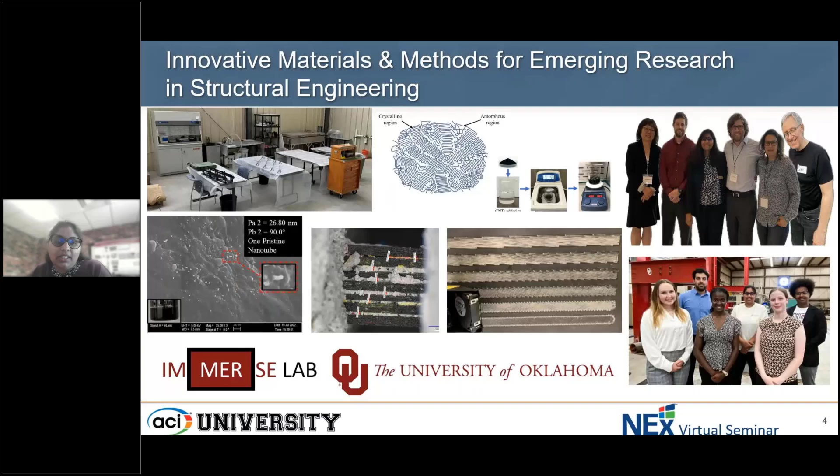The work I'm presenting is part of 8 publications, so you're more than welcome to dive deeper into anything I refer to here that you're interested in. A lot of this work was conducted at the University of New Mexico, in the Dana C. Wood Materials and Structures Lab, where I received my PhD. My students took over some of the work, and we published more in terms of concrete as well, which I'll briefly go over today based on time.

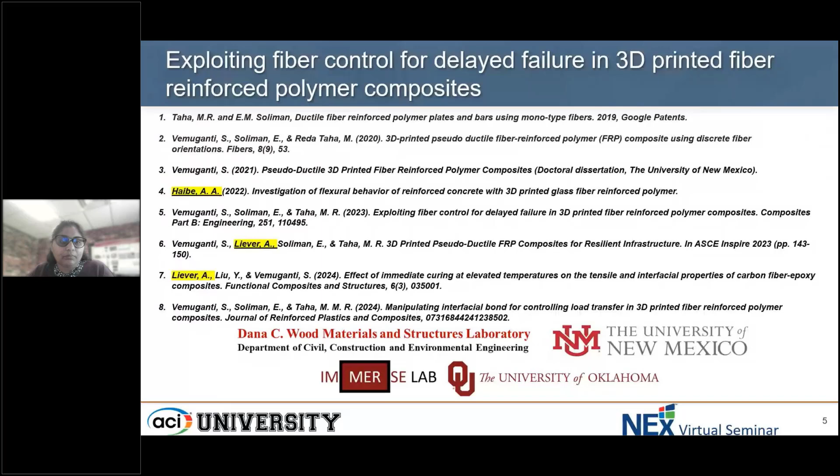Before we get into 3D printed fiber reinforced polymer composites and fiber control, let's talk about FRP itself. We have two primary components: fiber and matrix. Together they become a composite material that not only provides stiffness and strength because of the fiber contribution, but also protects and transfers load between the fibers due to the matrix component. So the entire composite is superior to its individual attributes, and both the fiber and matrix play a crucial role.

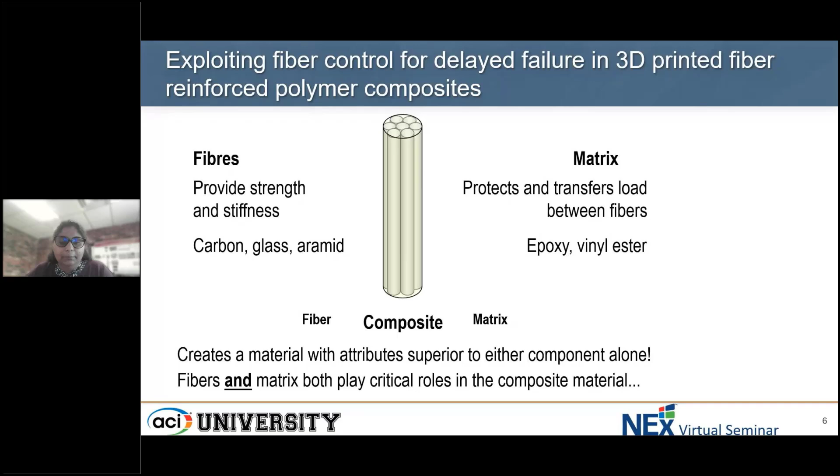Fiber reinforced polymer composites are more popular than ever in different kinds of fields, demonstrating various properties: long-term durability, lightweight, high strength, impact resistance, and corrosion resistance, which is one of the primary uses in civil engineering. Rebars with carbon and glass fiber reinforcement demonstrate great corrosion resistance that other materials in civil engineering cannot demonstrate.

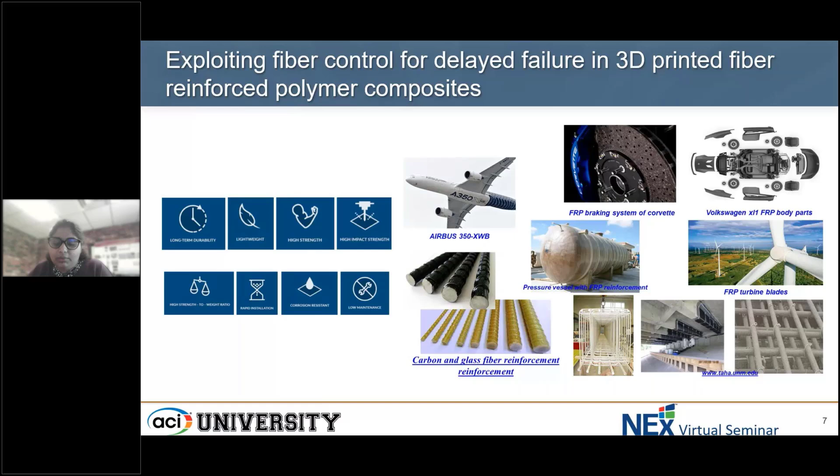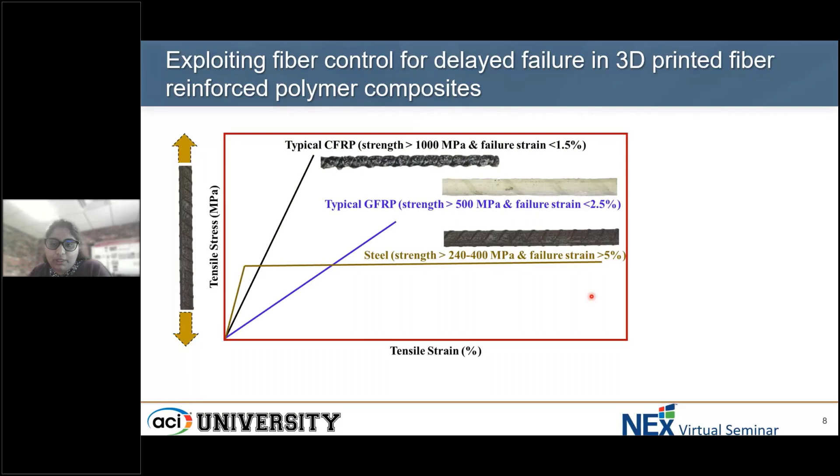We have conservative design limits, so to take full advantage of its tensile strength, its ductility definitely needs improvement. Multiple efforts were made in the past, especially something called fiber hybrid composites.

We have pseudoductility, which is a flat topped stress strain curve of a monolithic tensile test setup, and a ductile behavior that offers the strength needed but also prolongs failure to a higher strain.

But the limitation of these fiber hybrid composites was found to be that high strains are possible, but only at low strengths. There is therefore a large reduction in capacity, though they can offer those high strains.

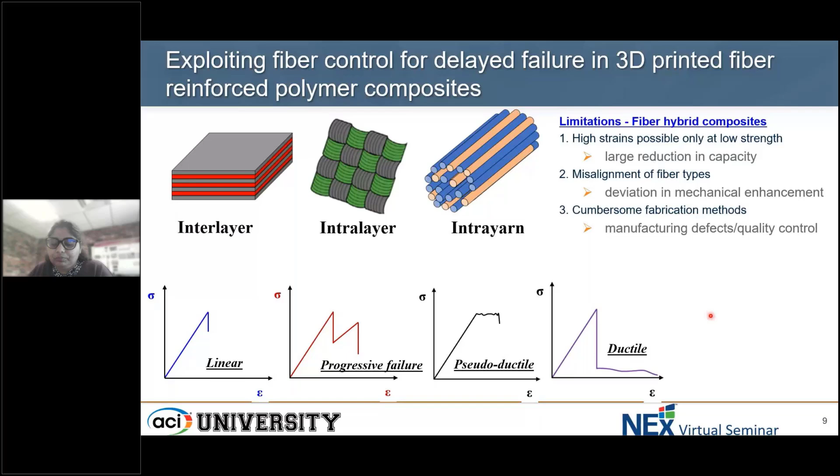For this particular topic, the goal really was to achieve a ductile or pseudoductile FRP composite. But the goal is to achieve that using only one type of fiber, meaning either glass or carbon, doesn't matter, but only one type of fiber, in other words a monotype fiber instead of a hybrid type fiber.

And the way we want to achieve that goal is with 3D printing. So I'm going to discuss some of the outcomes of this particular process that we adopted.

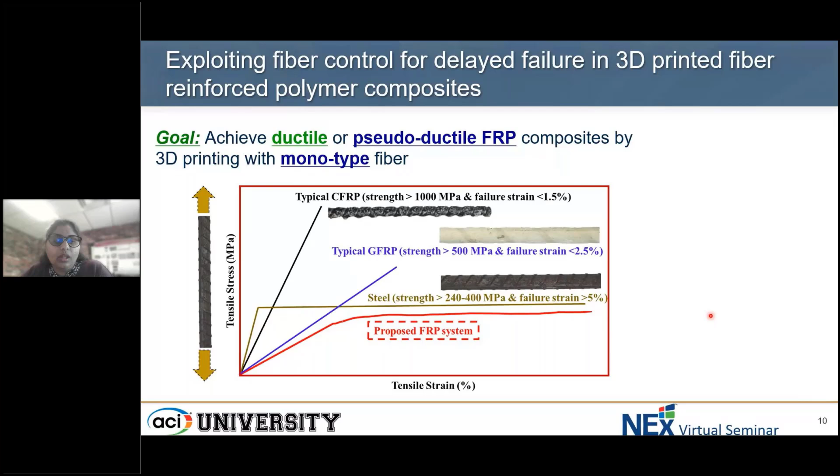So, why monotype fiber? The entire hypothesis started from a patent listed in one of the eight publications shown before. This hypothesis revolves around engineering the basic, fundamental mechanics of the composite, the shared stiffness between different layers.

An FRP composite consists of different layers, or a stacking sequence, that has different orientations and fiber layer thicknesses, and this determines how the shared stiffness between these layers works out.

These were governed by load sharing ratios, determined using, one, the modulus of elasticity; two, the area which a layer occupies—if layer 1 occupies n1 times a thickness of, say, 0.1 millimeter, at a particular fiber orientation of theta 1, then number of layers times layer thickness gives us the area that layer has been occupying; and you have I, which is the layer number itself.

These parameters govern what kind of shared stiffness the layers can really demonstrate. If one layer takes the load and fails at its own strength, how do the rest of the layers pick up this residual load and demonstrate that progressive or delayed failure mechanism?

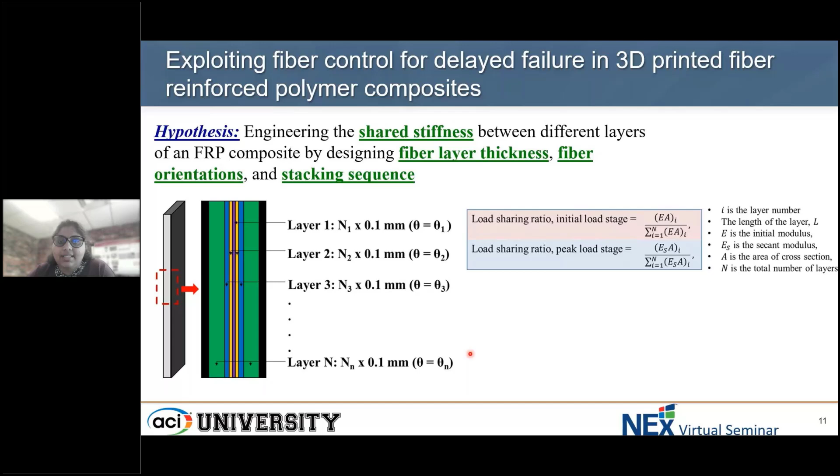To get into the methodology itself, we've used nylon-based thermoplastic filaments, and the fiber itself is a fiberglass filament. The mechanism used in the 3D printing technology is continuous fiber extrusion, meaning this doesn't relate to chopped fiber.

It is a mixture of the thermoplastic along with the chopped fiber that has been input into a filament maker, which makes a filament that now has both a fiberglass component and a thermoplastic component. So this in itself is a fiber reinforced polymer.

We basically use a continuous filament fabrication, which is a way to print or extrude a thermoplastic filament along with a continuous fiber in the same layer. So in that exact same layer made with thermoplastic filament, you are also able to input a continuous fiber into that exact same layer.

As you can see in this demonstration, the same layer has both a thermoplastic component and the white color fiber component. What this technology does, because of its potential to extrude continuous fiber on the layer, is let you control with G-code which orientation this continuous fiber can take.

Because chopped fiber, if you look at it, you are not able to control the direction or orientation of the fiber. But with continuous fibers, you are able to coordinate and govern it such that the print head gets input from the G-code, where the orientation of print needed is inputted into the software.

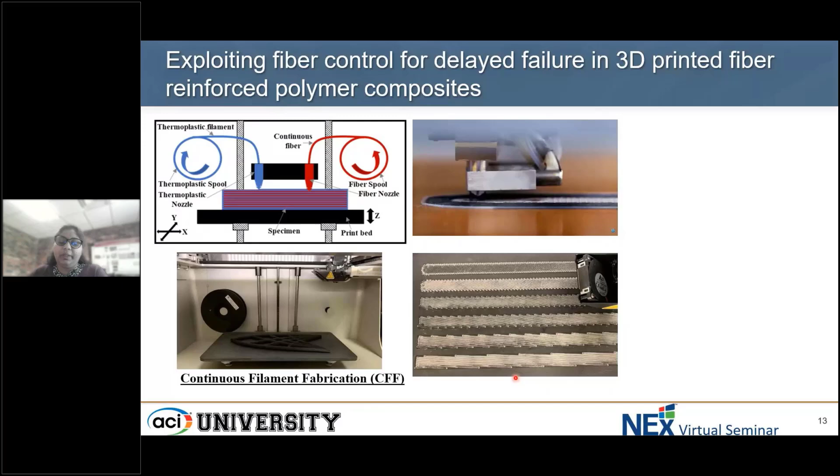Now, how accurate that is, we have also looked into. But first, a quick look into the 3D printer components itself. We have the print bed here and the fiberglass filament spool here. We have a thermoplastic filament spool behind the printer, which is not visible in these pictures.

The print chamber itself is not a very highly controlled print chamber. It has a small opening, but the temperature still doesn't reduce very abruptly.

Then you have a print head system with two nozzles, a fiber nozzle and a thermoplastic nozzle. The loading tube gets into the print head, carrying both the thermoplastic filament and the fiberglass filament, which respectively come out of the specific nozzles. These nozzles heat more than 223°C in order to accommodate both materials. For the fiberglass, it's more, about 270°C.

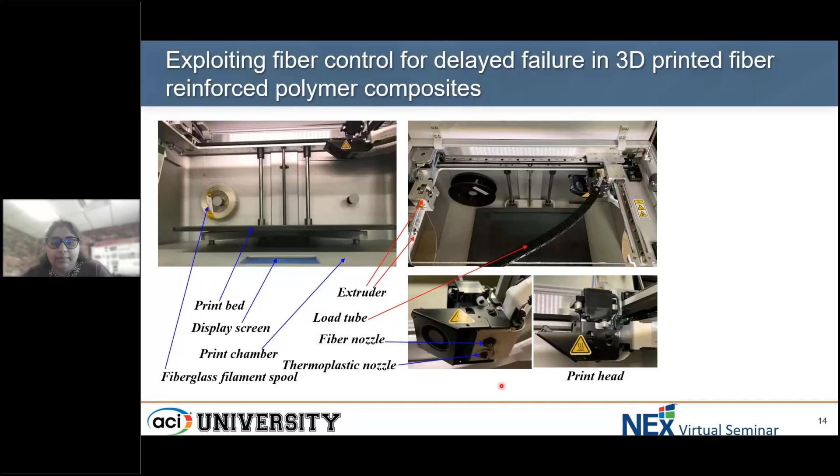So, as I was talking about accuracy, how do we determine whether the orientation that we require is actually getting onto the bed? How do we know whether the orientation that we ask the G-code to extrude onto the print bed is accurate? So we've done some microscopic investigations to see how the fiber is actually aligned with the thermoplastic.

If you look at picture B here, the 0 degrees angle is very accurate. We can achieve 100% accuracy in this regard. When you go to the next fiber angle, like 12 degrees, we've still been able to achieve about 12.13 degrees in the extruded final product, which is still very accurate. 24 and 30 degrees also have only a 0.12 and a 0.17 degree variation in them.

So this shows how accurate 3D printing can be in order to get the final product which you have designed to contain certain orientations or thicknesses or things like that. This is just an example.

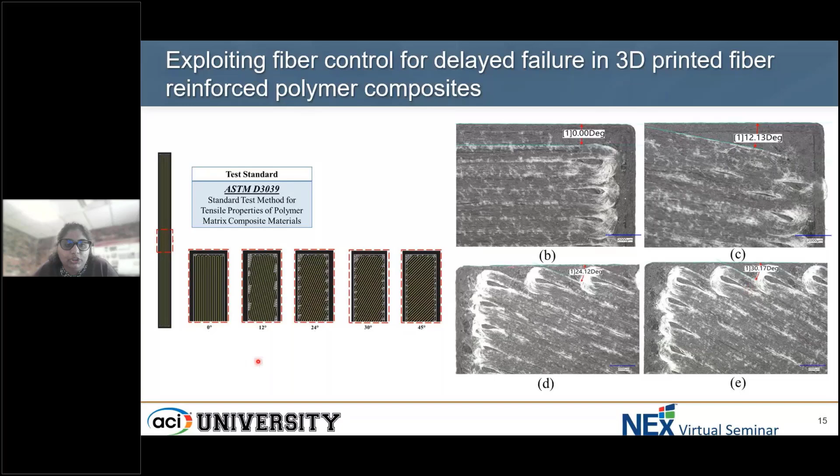So if you look at the project itself that I was talking about, we started off by just printing these orientations like 0 degrees, 12 degrees, or 24 degrees, because we wanted to achieve their properties - both the elastic modulus, the tensile strength of the material, as well as the secant modulus - in order to input it into the finite element model.

This is a standard ASTM D3039 test that we performed. By testing all these composites, we were able to achieve a data set of how each fiber orientation and the composites with that particular theta behave.

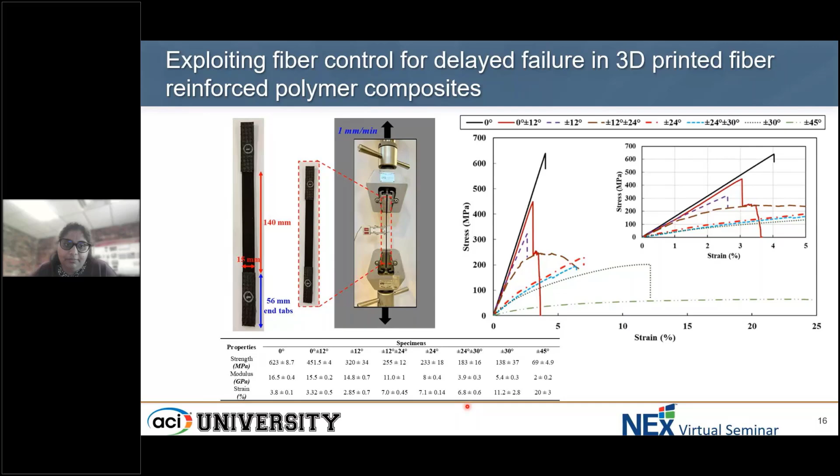So if we look at the failure modes of these composites, the 0 degrees fails pretty similar to a traditionally manually fabricated fiber reinforced polymer composite. That typical broom-like failure has been noted. So you can definitely say that the 3D printed composite fails in a similar way to manually fabricated composites.

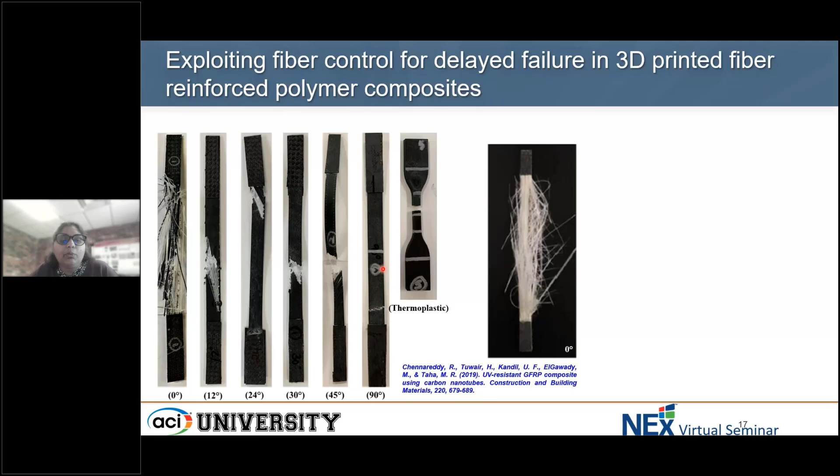The other angles, which are very cumbersome to achieve in a manually fabricated setup, we were able to achieve in a 3D printed setup. So you're able to get the fiber orientations and the properties that they demonstrate.

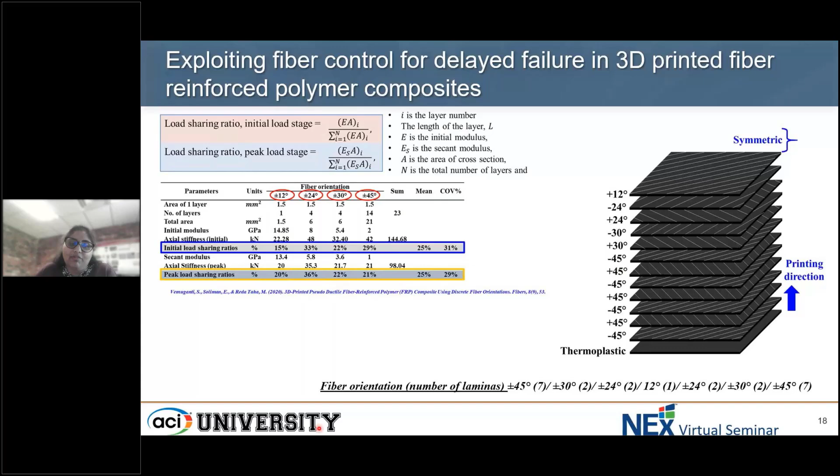So if we look at this particular preliminary design, we did achieve somewhat of a progressive pseudo-ductile behavior. If you remember, I showed you how ductile, progressive, pseudo-ductile, linear work. We see a nice linear behavior in the beginning until the tensile strength of the composite has been achieved.

Then we saw a really abrupt failure, which is indicated as drop 1 here. All 5 composites we tested demonstrate similar kind of behavior. After drop 1, the higher angle layers, such as the 45 degrees, observed some debonding from the remaining composite. So this corresponds to drop 1.

Then we have drop 2 here, which was followed by a small drop. Though abrupt, it was smaller in capacity. And then we had drop 3, which resulted in the entire damage leading to failure of the coupon itself.

In particular, if you see the strength and strains of the discrete fiber orientations, the orientations that just had the 0, 12, 24 and all that, when combined this way, definitely the behavior is different. The strengths for 0 degrees are somewhere around 600 MPa. However, for 12 degrees, they are lower. When combined in a composite, they're even lower. So definitely there are differences between the single fiber and a combined kind of composite.

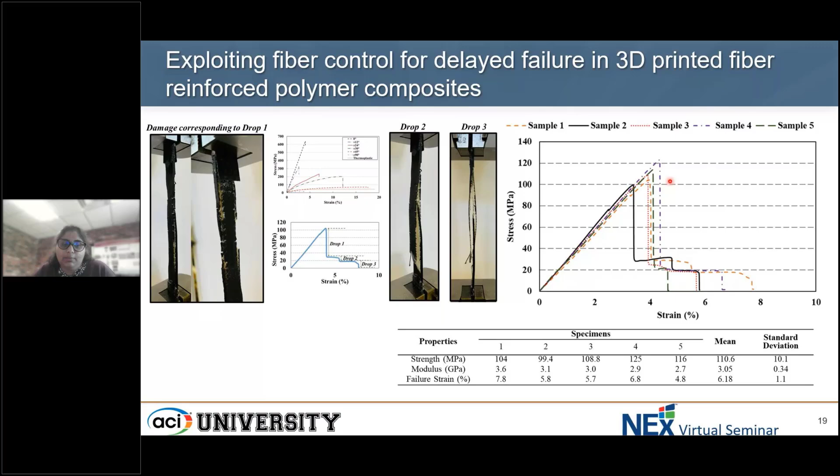The important thing was to understand how this composite would behave in a perfect bond situation. How would this composite really behave? For that, we performed some finite element analysis. We used ANSYS modeling, and we assumed a perfect bond between layers, which in all reality is not possible.

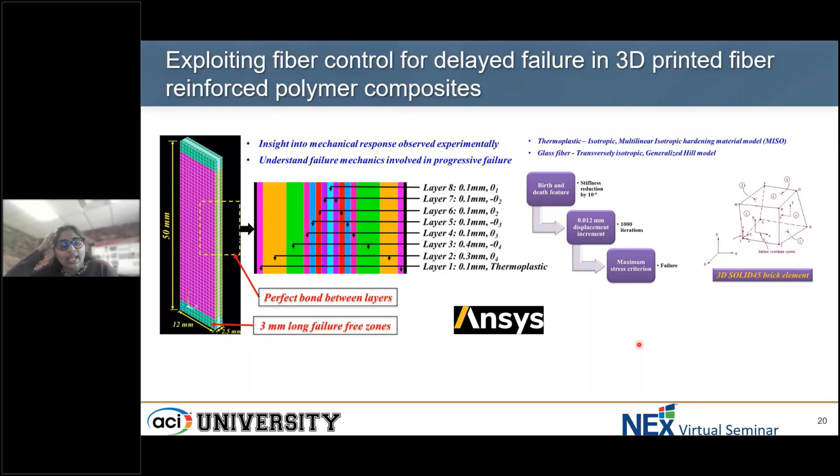Once you get that perfect bond between layers, the same exact design behaved somewhat differently than the original. You can clearly see there was no longer an abrupt failure. There was no longer a large drop in capacity. There were more smaller drops in capacity, which is more of that progressive kind of failure that we've seen in the past. So a considerable loss in load capacity of the composite, if you see in the experimental, it's because of an early stage of damage due to multiple layers failing together.

Because of those multiple layers failing together due to the bond that is between those layers, with a perfect bond, that is not the case that is happening here. There were interlaminar effects in the load transfer between layers, and they could be controlled if the load transfer between those layers is controlled.

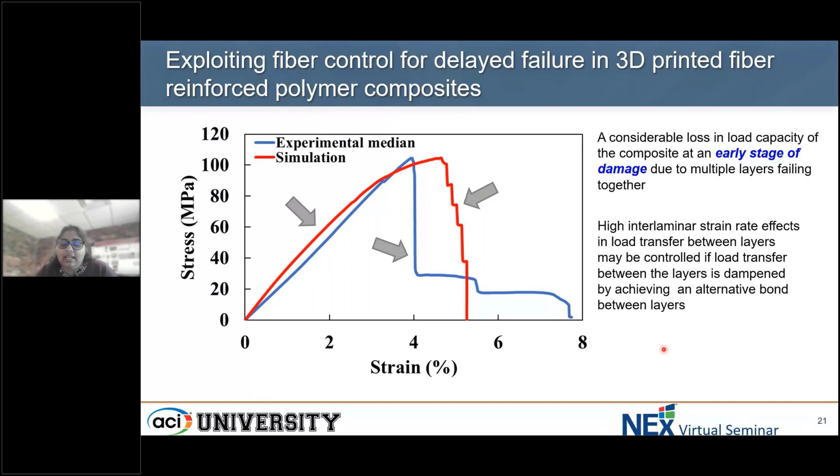We hypothesized, based on mechanics and different kinds of bond related studies, that because of that early stage damage where multiple layers are failing together, we should really look into how these layers are connected. So if they are connected with a weaker kind of interface, how does the load transfer work?

Theoretically speaking, it must be dampened as well, because matrix is where the shear transfer happens, so that the load one fiber takes is transferred to the other fiber to take that residual load. If that shear transfer itself is weakened, then that load transfer doesn't happen, and therefore one fiber's breakage may not affect the other fiber's damage.

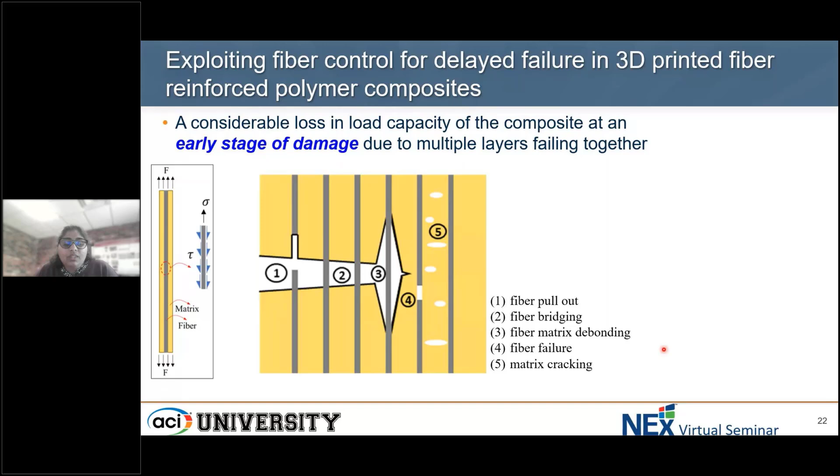But the problem here is that shear transfer, if dampened, also affects its mechanical properties, which is strength and other kind of properties. So considering this, a brittle uncontrolled failure mechanism occurs in a strong interface, whereas interfacial cracking or debonding occurs in a weak interface. An alternative kind of bond needs to be established. We are talking about 3D printing here, which is mostly like a continuous process. So how do we establish this alternative bond between the layers?

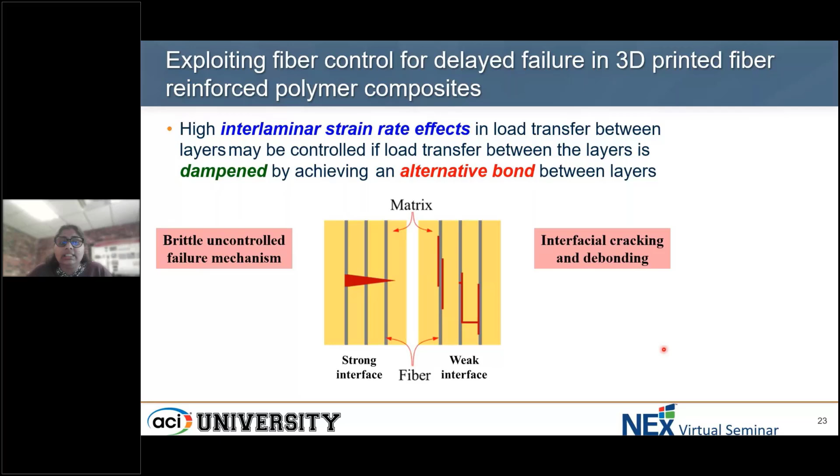What we went ahead and did is establish three configurations. We considered a fully bonded configuration, which is the process of 3D printing just taking over and continuously printing. Though it is not a perfect bond, we are considering that as a fully bonded configuration. The second configuration we established was what is called a thermal block configuration—I will explain with pictures what that means. And the third configuration we established is a fully debonded configuration, meaning the fiber orientations are kind of separated without any kind of bond between them, to see what that leads to.

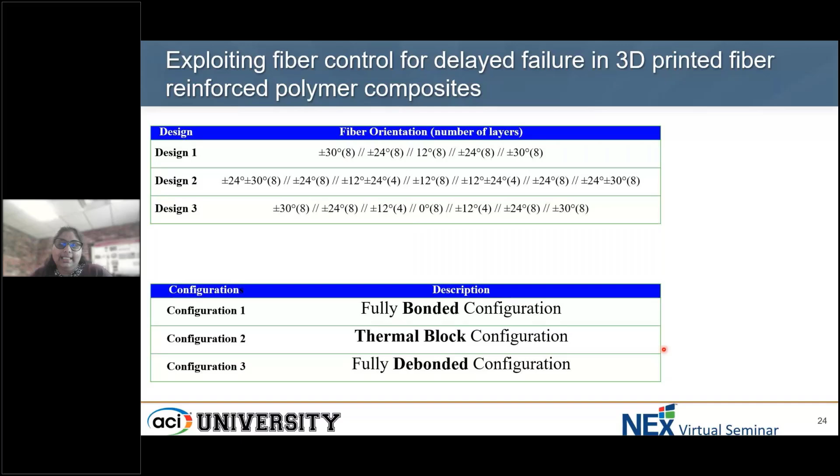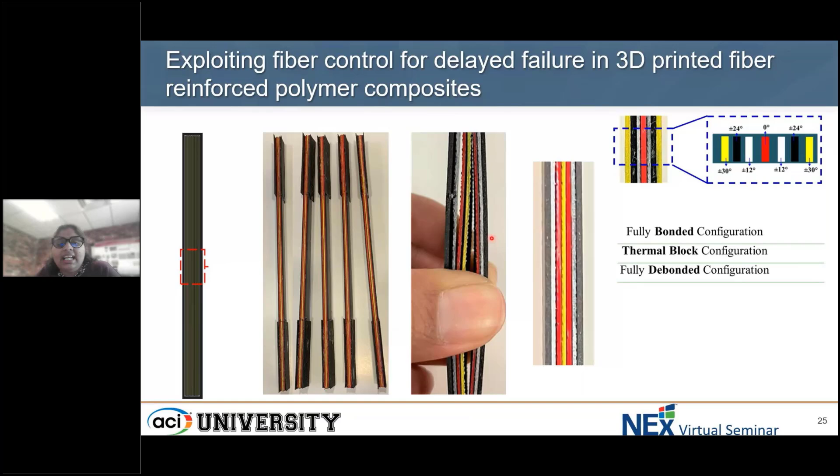So if we take a fully bonded configuration, because all of those are combined, the fully debonded configuration is quite the contrary. If you look at these angles here, the legend of which is provided here, you have color-coded angles that are completely separated from one another. You don't have any kind of bond between them to allow that shear transfer.

If you consider a thermal block configuration, what we did is, since cooling and heating environments really affect polymerization and the ability of layer welding—welding the layer that has been deposited with the layer that will be deposited—layer N needs to weld with layer N plus 1. For that, temperature requirements and print chamber conditions are a must. To create that alternative bond between these two layers, we affected the interface between layer N and layer N plus 1.

From experiments, what we noticed is that when we immediately print layer N, the temperature on that layer is about 40 degrees. After waiting 20 minutes, it's about 29.6 degrees. After waiting about 40 minutes, it reduces to another 28.2 degrees. So forth, until 90 minutes of print lapse time, it's about 27.7 degrees at the layer interface.

So to print the next layer N plus 1, instead of having nice heated conditions on that interface, they now have a cold kind of joint, which affects the polymerization at that layer. Of course, waiting 90 minutes to do each layer is an impossible and unrealistic task.

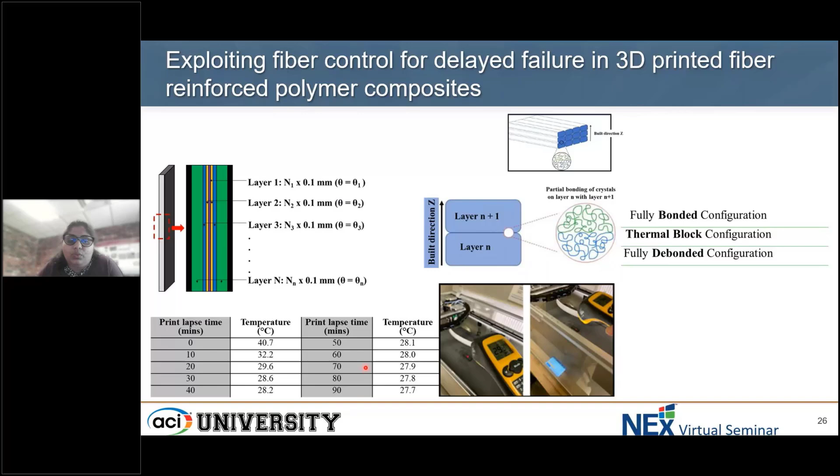So what we did is we used what is called dry ice. That dry ice, instead of taking 90 minutes to come down, that rapid cooling mechanism in just 15 minutes brought the temperatures to very close to 0 degrees. So we were able to achieve faster and much lower temperatures in order to create that debonding interface between layers.

If you look at the paused layer itself, you see there is a nice separation between layer N and layer N plus 1, demonstrated using this microscopic picture here. So the technology, hopefully in the future, if there is a possibility to incorporate this cooling mechanism into the 3D printing technology itself, that will save a lot of time and effort. But for now, to demonstrate how this alternative bond can be achieved, we adopted this kind of procedure.

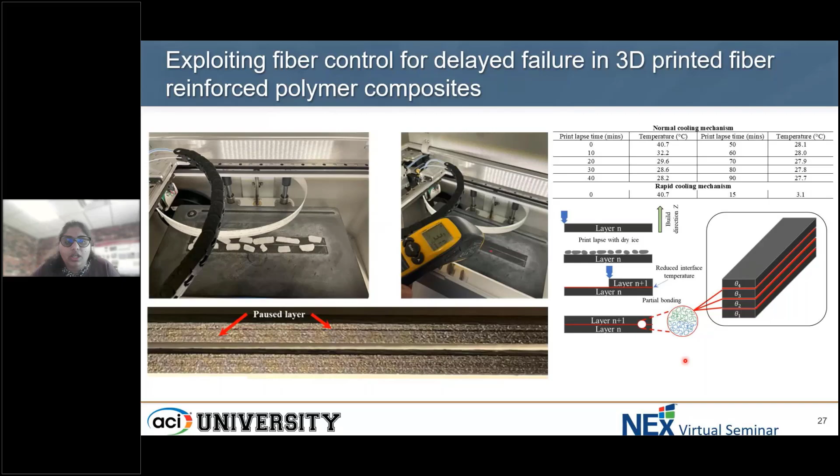So for the first design, which is a combination of 12, 24 and 30 degrees, what we saw is, in a bonded configuration, there was a really abrupt kind of drop. The strengths achieved were higher than what we saw before, but of course not as much as the 500 or 400 MPa that we've seen for individual fiber orientations.

If you look at a fully debonded configuration, that was fantastic because it showed a nice progressive failure where there was a small drop. However, we were able to achieve that increase in capacity because the other fibers just weren't being damaged. Because of one abrupt failure, the other fibers did not get any effect due to that lack of bond.

The thermal block, which is more in terms of the 3D printing process itself, showed a nice progressive failure. Though the load did not increase after the first drop, we still saw the other layers maintaining that load for a certain amount of strain percentage. So in this first design, a fully debonded configuration got us up to 5% strain, although at a compromised load, but we still have a better configuration compared to the fully bonded type.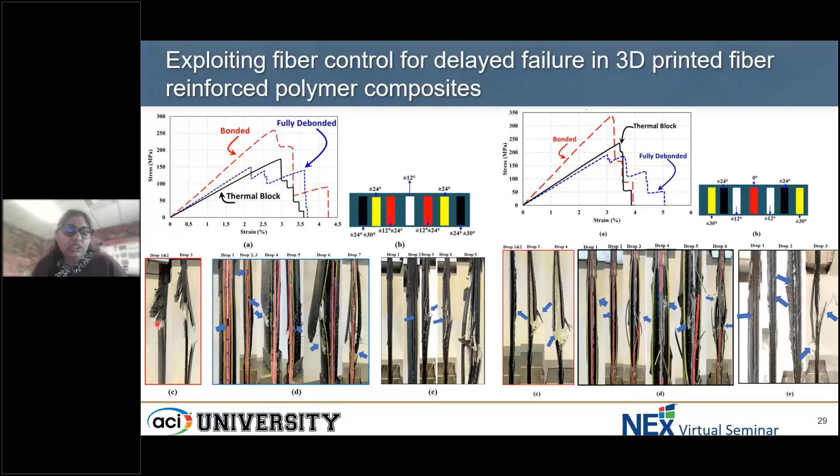Fully debonded configuration and fully bonded configuration in design 2, which is the red line here, attributed to the red box, shows failure in 2 to 3 stages. The blue box, fully debonded, shows many drops, but also many kinds of damage in different layers, not all together at once. Drop 7 finally showed that complete damage.

If you see the black color line here, again a progressive stepwise sequential failure, thermal block, at a compromised load compared to the bonded, but definitely higher than the fully debonded because there is still some kind of bond to allow the shear transfer and therefore the strength increase, but not enough bond as the bonded to get that strength. However, the bonded had abrupt large drops, whereas the thermal block had smaller load capacity drops. And design 3, the fully debonded performed very well, and the presence of the 0 degrees also helped very much because there was some kind of brooming at the top. After that brooming happened, there is still increase in load capacity, and then there was a reduction in capacities with respect to the drops. But the highest strain was achieved for this fully debonded configuration.

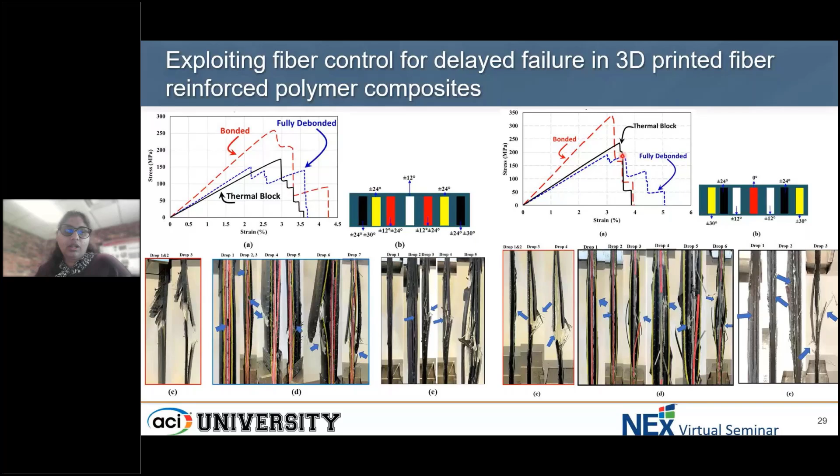We performed some ductility index measurements using the typical energy-based approaches by Grace. Designs 1, 2, and 3 performed very well in terms of fully debonded configurations for ductility. Bonded configurations obviously lack that sense of ductility, but the thermal block configuration of design 1 showed huge improvement over the bonded one.

Again, looking at strength, modulus, and strain at failure, you will see that the bonded will be at the highest strength in terms of design 1 and design 2. But for design 3, you have a fully debonded one in terms of strain, that is higher strain at failure for fully debonded. And that control bond, or thermal block, is also higher compared to the bonded, which is what we were trying to achieve.

If you look at comparisons between traditional unidirectional typical GFRP composite, it's about negative 89% ductility when compared to a 3D printed GFRP. A grade B steel, of course, is the most ductile compared to this graph here, definitely higher ductility compared to 3D printed GFRP and typical GFRP. But compared to that typical GFRP, the 3D printed GFRP is doing pretty well on the ductility index side of things.

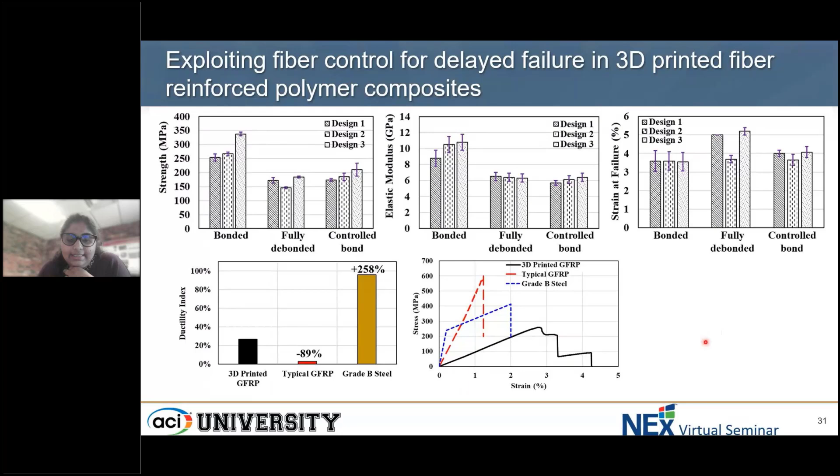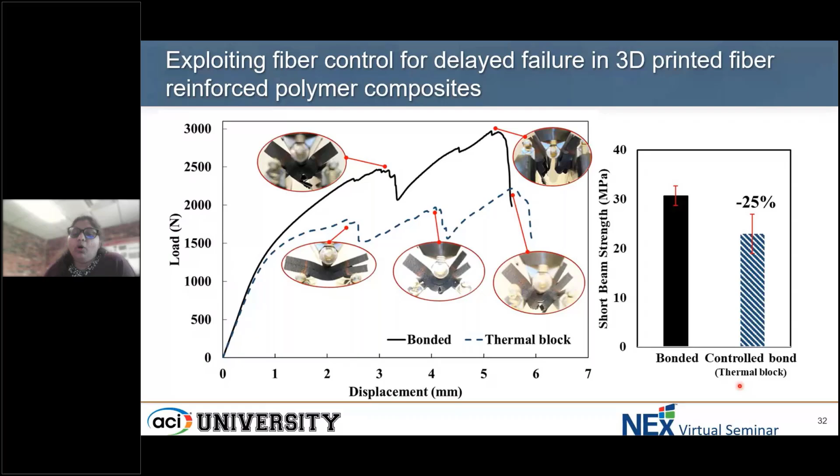We also quantified this particular bond using some interlaminar tests and interfacial adhesion tests. This is a shear strength, interlaminar shear strength test for the different kinds of bonds. In a completely debonded specimen, we are not able to perform this test because the failure mode is slip. So in the bonded configuration, for this interlaminar shear strength, the control bond shows a 25% reduction in bond strength itself. So the bonded and the control bond differ in terms of bond strength, and this is a way to quantify it.

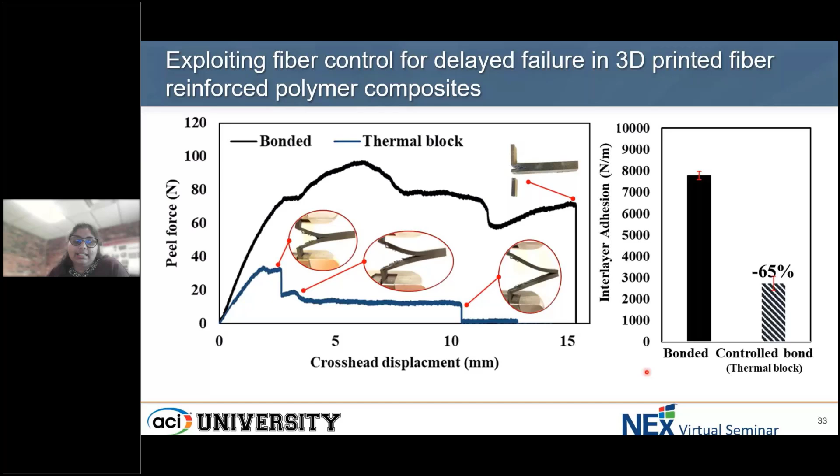These are ASTM standard tests. This one is a peel test, basically a T-flange or dual cantilever beam that we put into a tensile testing machine, pulling one of the flanges. This has a 65% interfacial adhesion, or interlayer adhesion strength reduction in the controlled bond, which is thermal block, versus the bonded configuration. So clearly from these two interlayer tests that we performed, we were able to distinguish between these two bonds, and because of that reduction, we know that there is transfer of load that is affected.

Just looking at traditionally manufactured specimens, if you look at a Mateenbar, Owens Corning is the manufacturer of many FRP bars, rebars for civil engineering and construction uses. An OC Mateenbar is about 1000 MPa strength. Its process of manufacturing is very different. Achieving different fiber orientations is not possible, I would say, at this point in an OC Mateenbar, or with a pultrusion technique, which is basically used to produce these bars. It's already a highly cumbersome kind of technology, but to align those fiber orientations in order to get that resulting cross section is very challenging, and it won't be that controlled at this point. With the high mechanical deviations, we will basically go back to the same problems of fiber hybrid composites.

If you look at a vacuum assisted hand layup technique, VAHT coupon, that is produced using a manual technique of combining layers with a matrix component and completely wetting out these fiber layers.

That is also a very high strength coupon here. Getting different directions or adjusting and controlling directionality of fibers becomes challenging in that process, because it requires adjusting each layer to get that orientation. So controlling mechanical deviations is a problem there as well.

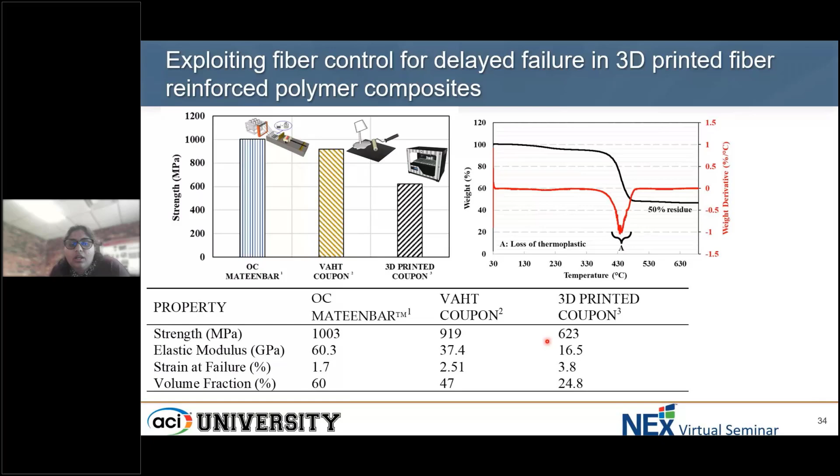We want to be able to put these composites eventually in concrete. To do that, we first need to understand how these composites behave inside concrete. Does a traditionally manufactured FRP composite behave the same way as a 3D printed composite? There might be strength and strain differences, but that's not entirely what's important. How do they react with concrete? And why do we limit ourselves to only cementitious concrete?

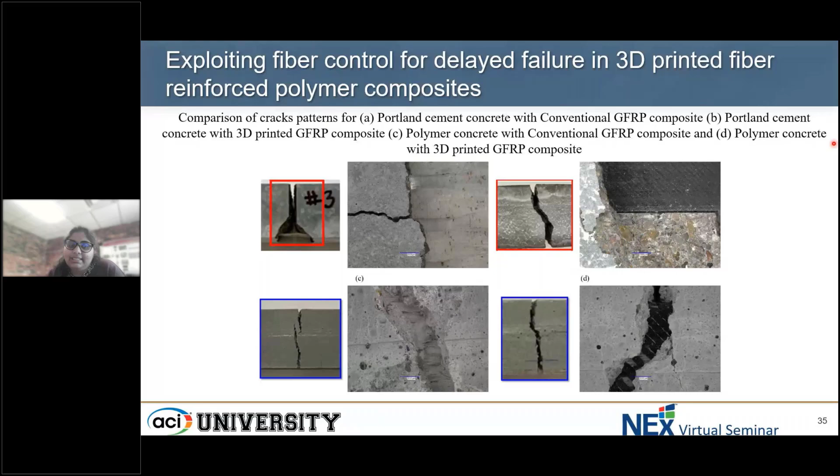Polymer concrete is also very highly popular, and we should see how a traditionally manufactured versus 3D printed GFRP, or this multi-directional GFRP we just presented, reacts with cementitious or polymer concrete. One of my students studied these composites in cementitious and polymeric cement mortars, and we observed good interaction between these 3D printed composites and both types of concrete.

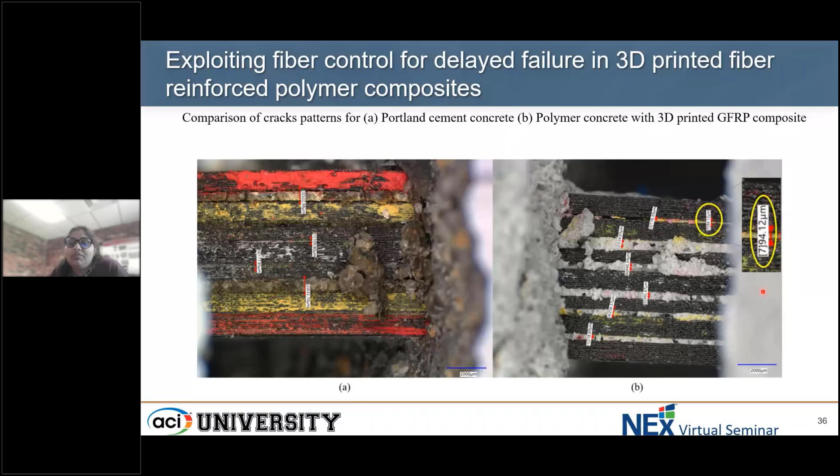We saw that cementitious concretes cannot necessarily get into small gaps. But if you take a fully debonded composite, which behaved best in terms of strength and ductility, polymeric concrete can actually seep into gaps of about 94 microns and allow that shear transfer to be so efficient that you get high strengths and a delayed failure strain, achieving ductility targets set by conservative standards.

So if you look at the behavior of 3D printed GFRP in Portland cement concrete, its ability to withstand strength is good compared to a traditionally manufactured GFRP composite. So it's safe to say that we can use 3D printed FRP composites in concrete going into the future.

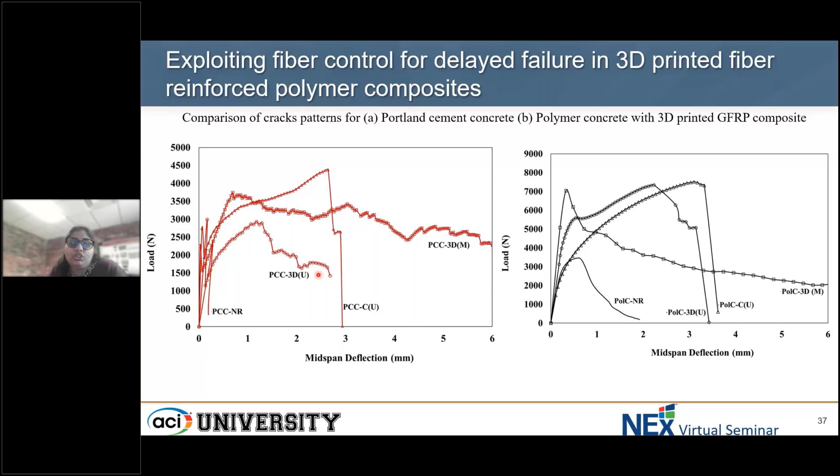We have some good directions we can adopt in the future, where we could possibly use Bayesian optimization or machine learning techniques, input into a computational model, to give us more designs that can achieve this high ductility index. We can also look further into the materials aspect, where improvement in the material or filament itself can improve the resulting ductility index and strength values.

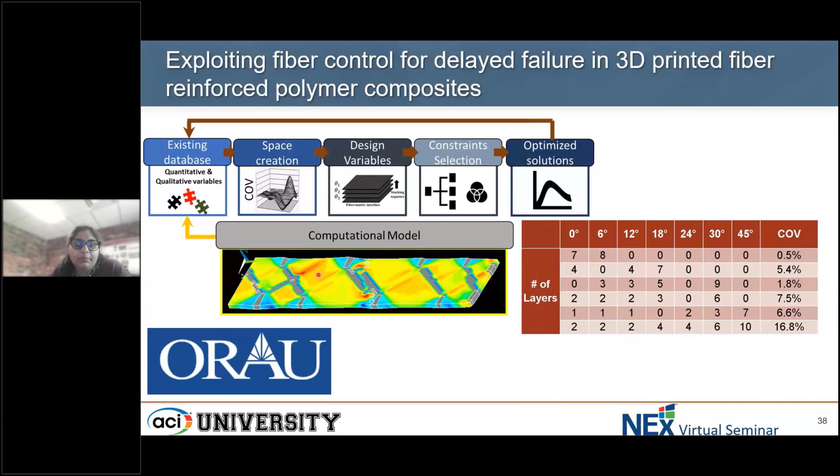Overall, I have some conclusions I can quickly go over. What you've just seen in this presentation is pioneering work with FRP, and more importantly a design-based approach with different fiber orientations controlled using fundamental mechanics concepts. The goal is developing pseudo-ductile behavior, primarily using one type of fiber only, not a combination of fibers. It's not to say that in the future we won't use multiple types of fibers.

There is 3D printing technology where two different kinds of fiber elements can also be printed, and using that may differ these results, but that design-based approach following fundamental mechanics concepts should still exist. So we've seen multiple designs with successful pseudoductility, with more progressive behavior achieved through different bond configurations, completely contrary to the uncontrolled failure mechanism we saw in FRP composites earlier. Reduction in interfacial and interlaminar shear properties can be achieved, and this reduction inherently dampens load transfer between layers, which in turn affects how the failure mechanism is affected.

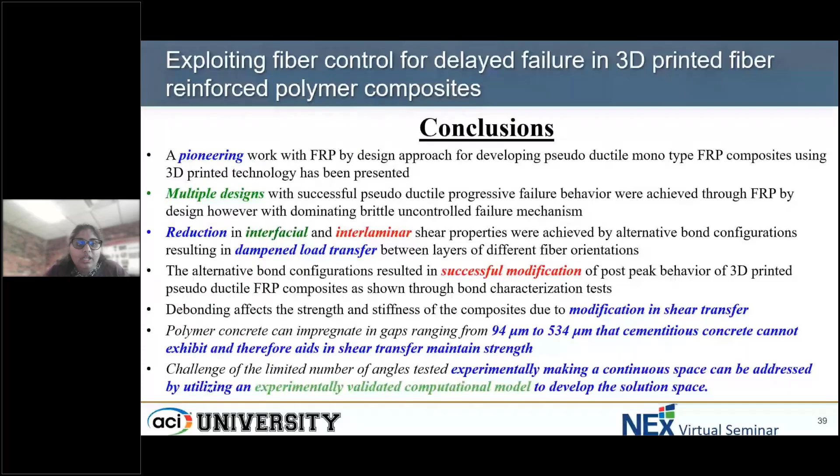So some look into the future. Current 3D printing technology has limitations on the thickness of specimens and the fiberglass spool strength and stiffness itself. We talked about this. So to produce higher strength and ductile designs, improvements in 3D printing technology would be a great future pathway.

Further investigations implementing transient analysis interface elements in finite element models can also give us a lot of information on these designs and how we can modify these bonds to better achieve ductile designs. For better shear transfer, but also through adequate debonding, a combination of bonded and debonded layers can also be a route we approach. This way we might be able to achieve desired strengths and stiffnesses, but also the ductility we are targeting.

An alternative bond through damping materials or hierarchical reinforcements at the interface layers can be introduced. We haven't researched that yet, but that's a great future pathway for all of you listening to think about.

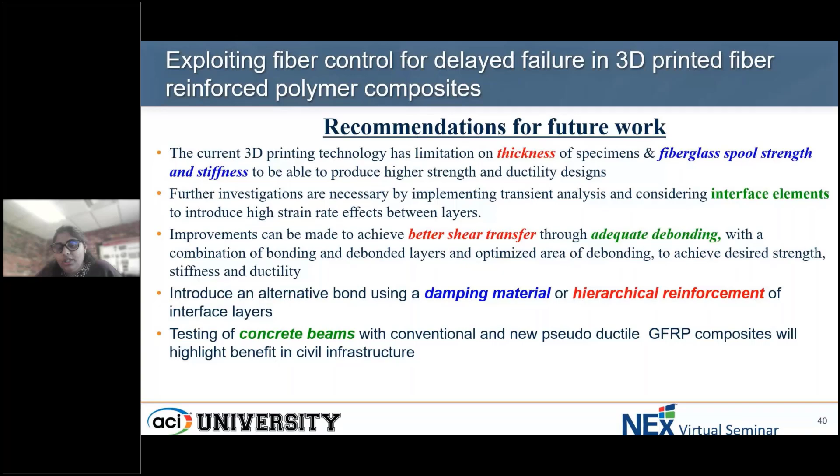Testing of concrete beams, either cementitious or polymeric concrete, with these new pseudoductile composites will give us information on how they can benefit civil infrastructure. So we have approached one of the designs, and we are hoping to take this work forward.

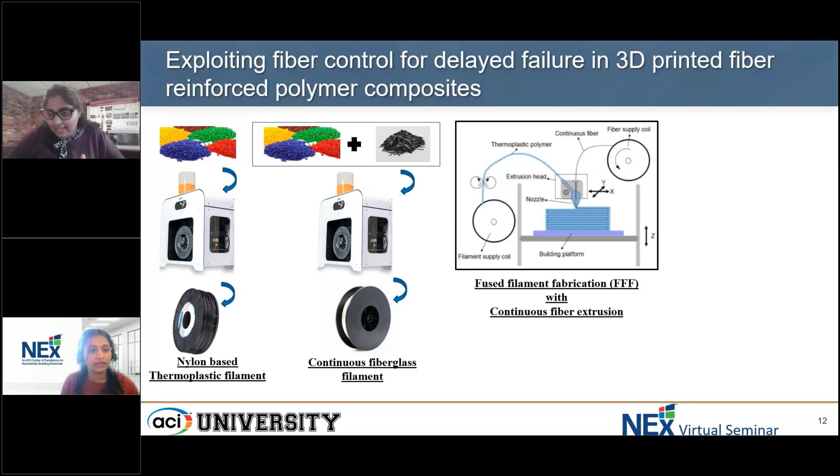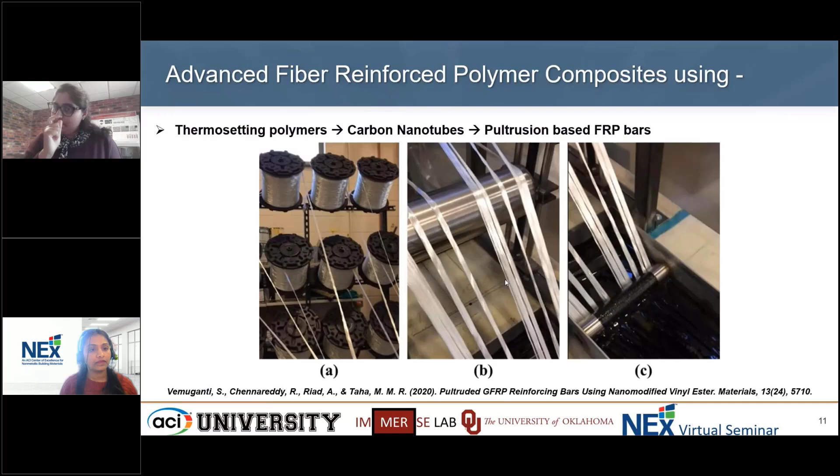Now, to be able to achieve designs with multiple types of fiber orientations, we're supposed to take all these strands and get them into the die itself, which is this one that is responsible. Oh, you can't see my pointer. So the die itself, I'm bringing my pointer here.

If you see the entire look of it, you have these strands going into a die which is covered with foam so that the temperature is maintained. That's the section it comes out of. The entire bar comes out as a circular section because the die has that section inside.

Now think about how we can remodel or redesign this die to get these fiber orientations maintained through the entire length of the die and come out with those orientations. It's such a challenging process because however you get the strands, you still have to impregnate them in a resin, then have another setup where each strand is oriented in a different direction, but eventually they all have to come together again.

So it's my understanding that whatever we do, eventually when it goes into the die, it still gets that same shape. It's challenging, but I'm really open to ideas. We can probably build a setup together with whoever asks this question. I'm very excited to try this out. We've brainstormed a little bit, but we don't have the time to do this because with other funded projects it becomes very challenging. If you're open to ideas, I'm happy to discuss and see if something can work out.

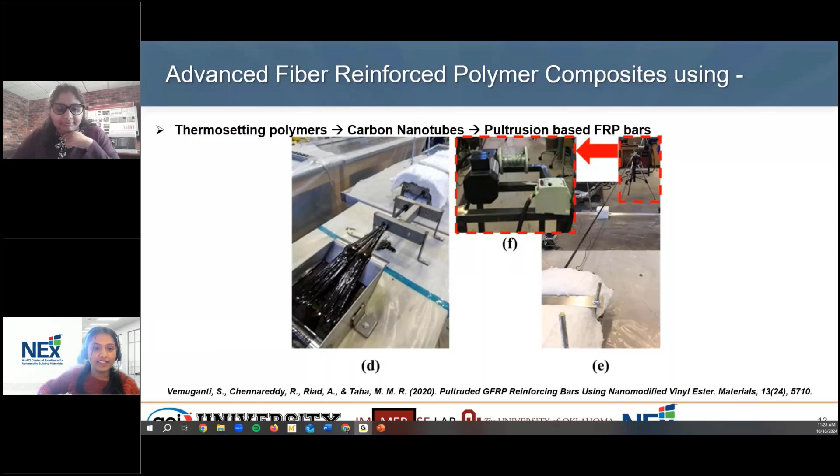Great, that's a great answer. Thank you so much, Shreya. And with this, I think we don't have any more questions. Thank you once again for addressing all the questions we had, and thank you for the excellent presentation. Thank you. Always a pleasure, thank you.